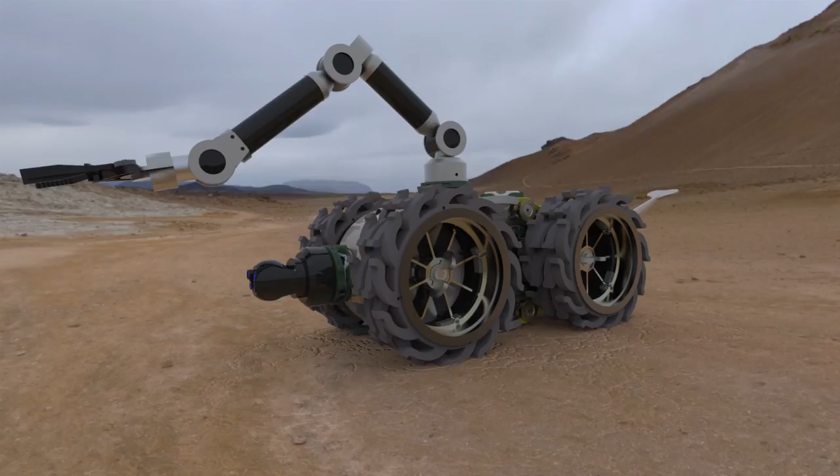Solid Edge ST8 strengthens its industry leadership and efficient 3D product design. This latest release further integrates synchronous technology into proven large-scale assembly modeling techniques. In this demonstration, we'll make several changes to a workbench stand supporting a recovery robot's chassis.

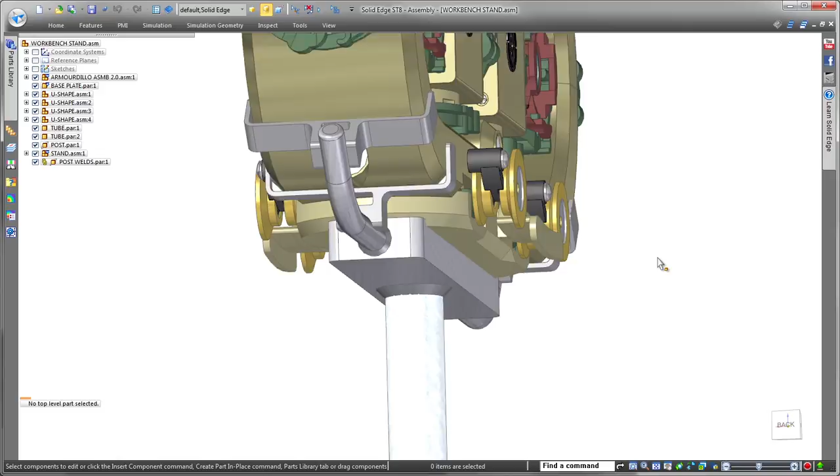New time-saving file open functionality identifies top-level assembly files, letting you quickly retrieve the overall assembly without having to search through a long list of subassemblies. Here we'll open the top-level workbench stand assembly.

Leveraging the power of synchronous modeling speeds design changes. To stabilize the workbench fixture part, we'll widen its base just by dragging its side face, and we'll define a small offset to get an exact fit.

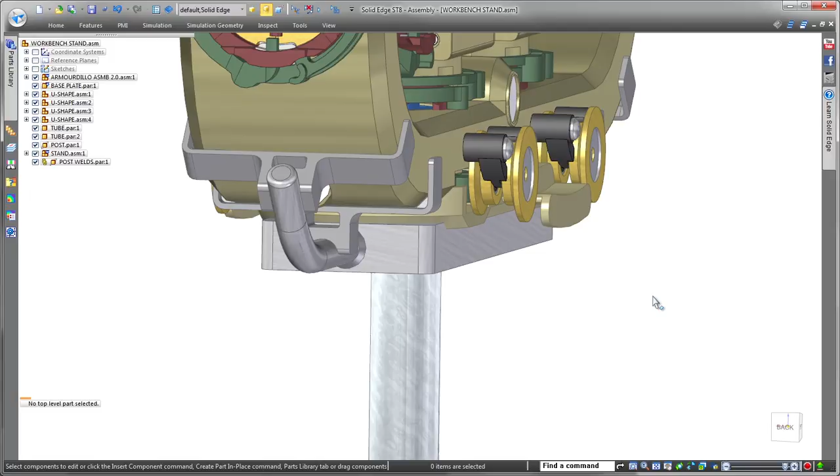Solid Edge specializes in providing all the tools you need to work on a part within an assembly. We'll activate the base plate part to implement some changes. Notice how Pathfinder indicates your active position within the assembly structure.

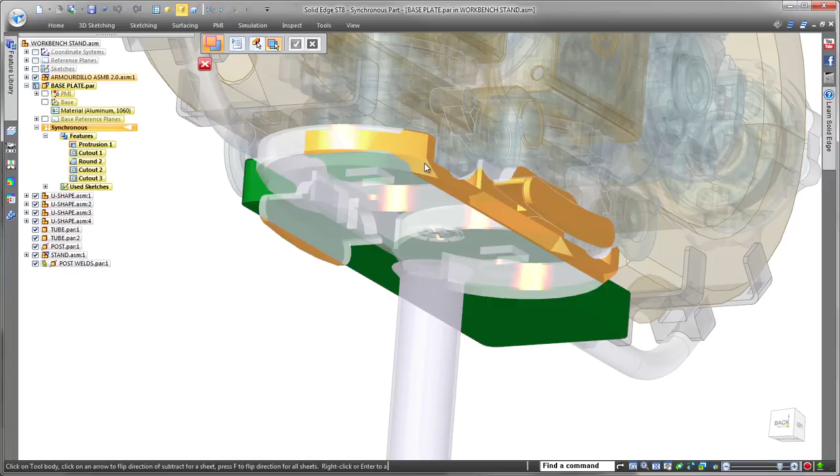Here, we want to remove material from the base plate to ensure a tight fit between the stand and robot chassis. We'll subtract material using the bottom of the chassis. Access to the top-level assembly components was crucial to get the correct result. Notice the result after removing material using the top-level assembly components. A perfect fit. This approach produces accurate results and maximizes your productivity.

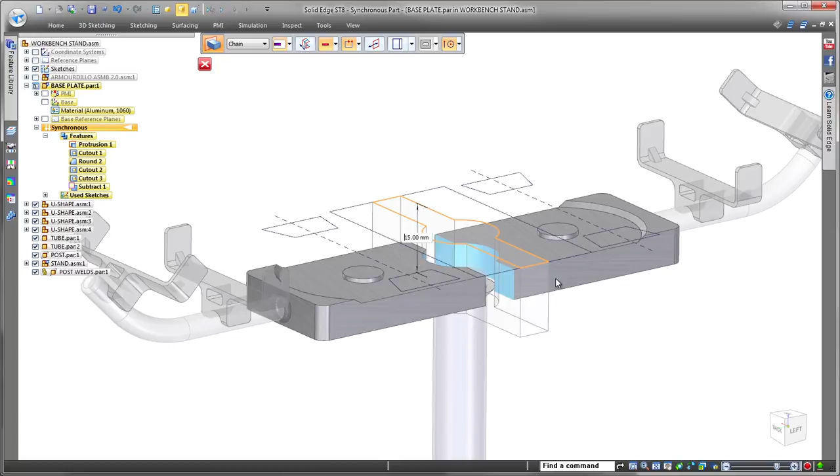Design reuse averts time-consuming and costly model recreation, so we'll make use of geometry already present in the top-level assembly. Watch as we use sketches from the workbench stand to create a relief pocket on the base plate and remove unnecessary features. Finally, we'll add some rounds to remove sharp edges and finish the base plate. With Solid Edge, working on subsystems and components within a large assembly is efficient and very fast.

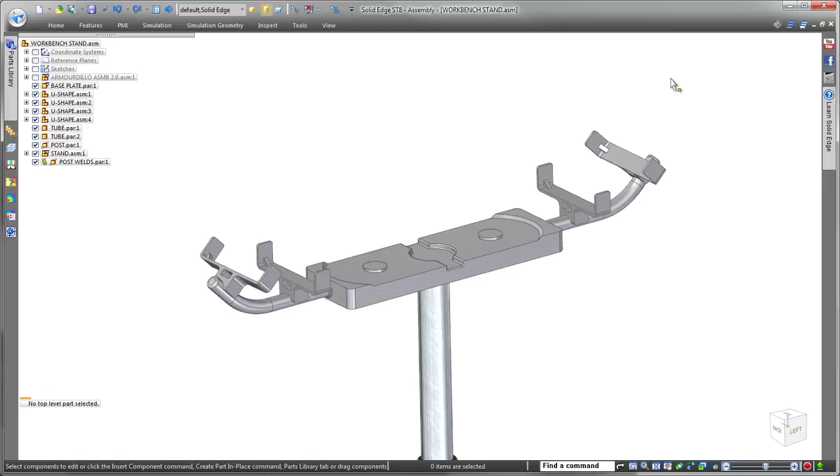Streamlined weldment design is delivered in Solid Edge ST8. The ability to create weld beads within the part environment gives you flexibility with the use of standard weld bead commands, part modeling techniques, or a combination of the two. With weld beads defined in the part environment, you have full control of the material definition, appearance, and access to their mass properties.

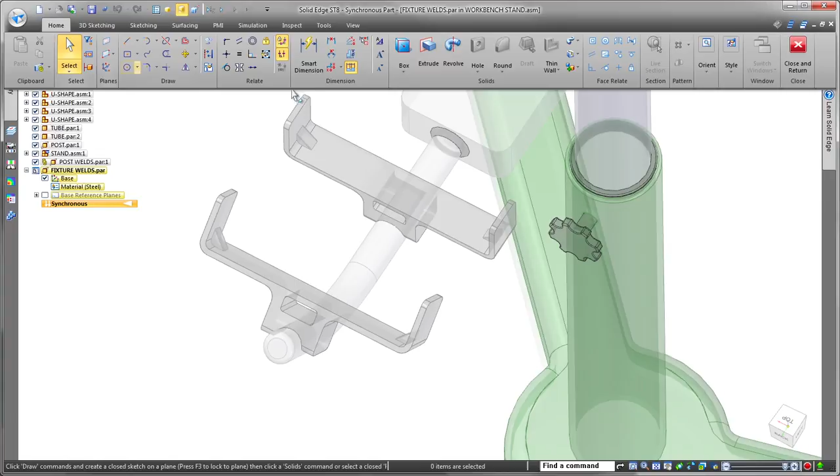We'll continue to work in a top-down design scenario, as this gives easy access to the assembly components. Here we'll create weld beads between top-level components while in the part environment. Their material is defined in the part, not the assembly.

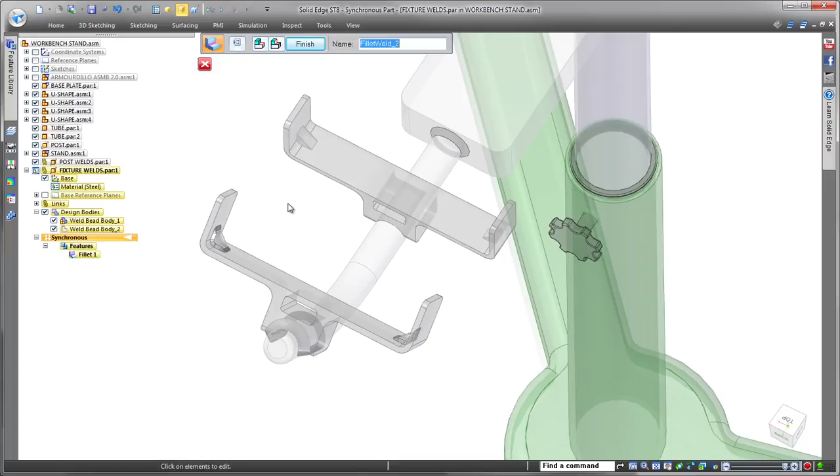Now that we've applied weld beads to one component, we can expedite the welding process to the other side with the use of duplicate part. Now that's easy, it's fast, and it greatly streamlines the welding process.

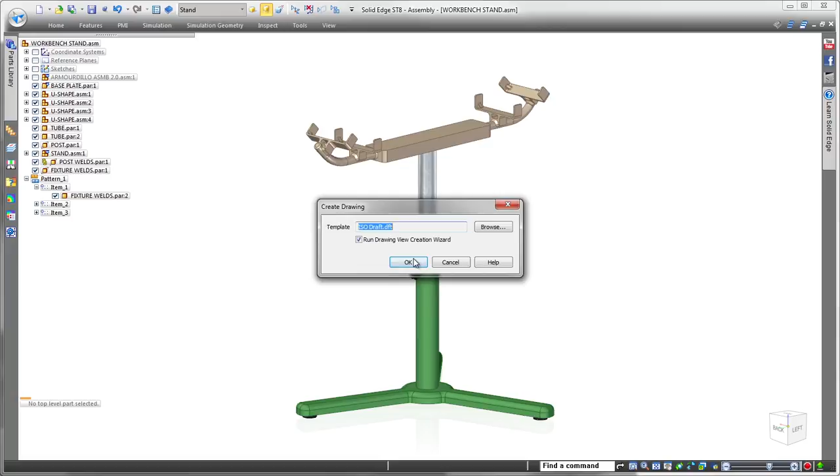When you need to efficiently document your weldment scenario on a drawing, Solid Edge shines. Watch as we place standard and auxiliary views with minimal mouse clicks. We'll apply a cutting plane to the front view, and from that cutting plane we'll pull a detail view to note information about the weld beads.

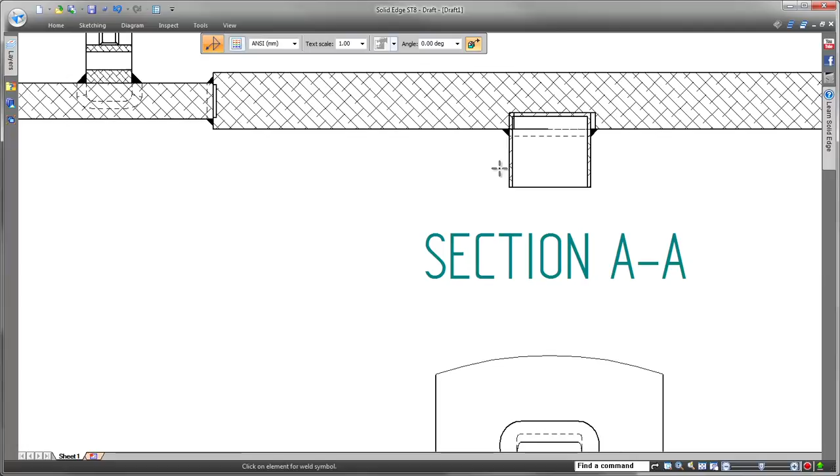Since we can extract weld bead information directly from the model, we save time and cut costs by avoiding duplication of effort. If a design change is approved, it'll be reflected throughout Solid Edge.

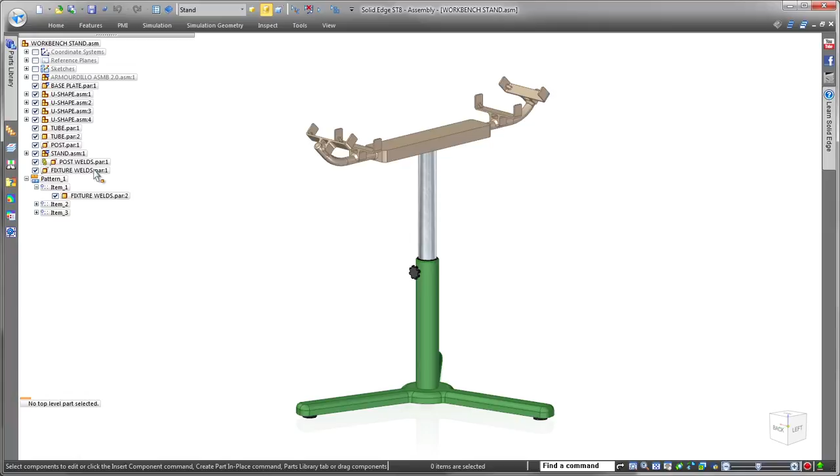Watch as we return to the assembly and increase the weld bead size between the post and fixture. Back in the draft environment, we're notified that a dimension moved, but also notice in the parts list the weld bead weight and cost also reflect the changes.

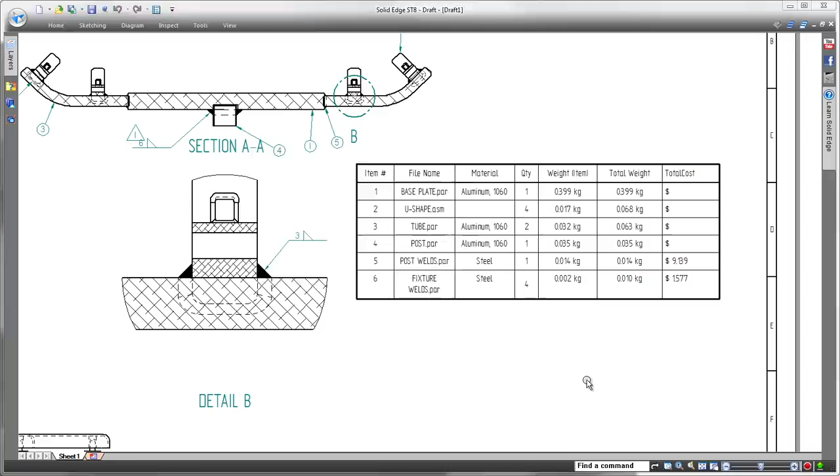Solid Edge with synchronous technology frees you to design more productively with the best tools and technology to get your job done right the first time. Solid Edge. Design better.